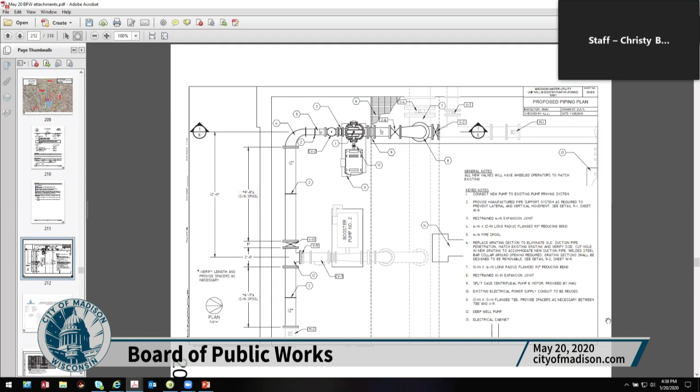Don't see his name in the queue, but I can certainly send him an email and point that out to him. Okay, thanks, Michael. With the safer at home order, I've got a lot more time to look at things like that, unfortunately. Oh, it's very helpful. Okay. So we'll take that under advisement and continue on with the consent agenda approved with that exception.

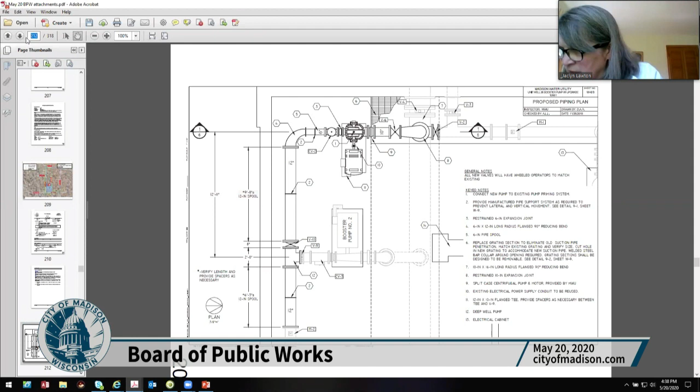And that public hearing. What item are we on then? 12? 10. 10. Do we want to start on 10 or save that for later? Let's save that. That gets us to item 12. Town of Burke agreement. Okay. What do we have here? So we need Chris Potowski.

Staff, when you're called on, can you please click raise hand so it's easier to find you? Yeah, sorry about that. Can you guys hear me?

Yes, thank you. Okay, so this item number 12 is an intergovernmental agreement with the town of Burke for the maintenance of Anderson Road and related storm sewer facilities. If you might recall, last year the Plan Commission approved a development on Manufacturers Road. As part of that development, Manufacturers Road would extend to Anderson Road, which is a town of Burke roadway.

The Board of Public Works approved those improvements on Manufacturers Road, and there were a few improvements in the town property as well. The town board has approved the work as well. And the final piece here is an intergovernmental agreement between the two municipalities for the joint maintenance of the street.

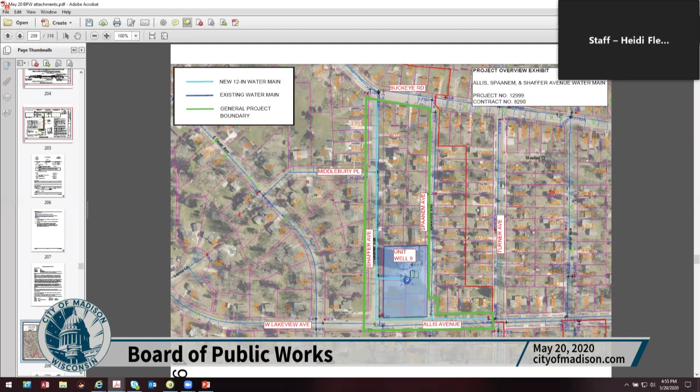Thank you. Go ahead. So you moved. Second? Second. Okay. Heidi, do you have that? Yes. Okay. Is there any objection by raising a hand? I'm going to put Joe's back down. Mute, then lower the hand. What a mess. All right, motion passes.

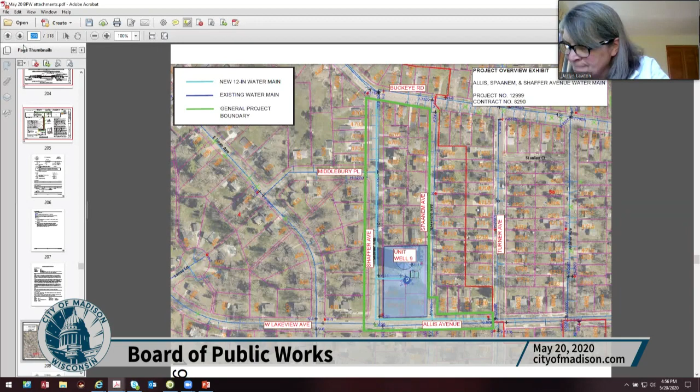Okay, now it's time for public hearing, which is item 5 with Kyle Frank on pipe lining noise impact. Okay. Kyle Frank. Hi, I'm Kyle Frank. I'm with City Engineering. So this is for noise variance for a lining project over on the north side. Kyle, people can't hear you. Anything? Heidi said you could not hear me. Can others not hear me? Yeah, you're really soft. I'll try and speak up louder then. Is that better at all? Yeah, that's a little bit better. All right, so

this is for a lining project and some night work variance that they are requesting. Essentially, what's going on is they need to use a different technique than they typically would because of the size of the pipe. And what that technique uses is hot water, and the process for bringing that water up to temperature takes longer than steam. And they didn't feel they could fit it in to the standard 12-hour workday that we allow, which is from 7 to 7. It sounds like it's actually going to take them about 15 hours to complete this work. So they're requesting to be able to work outside of those standard hours.

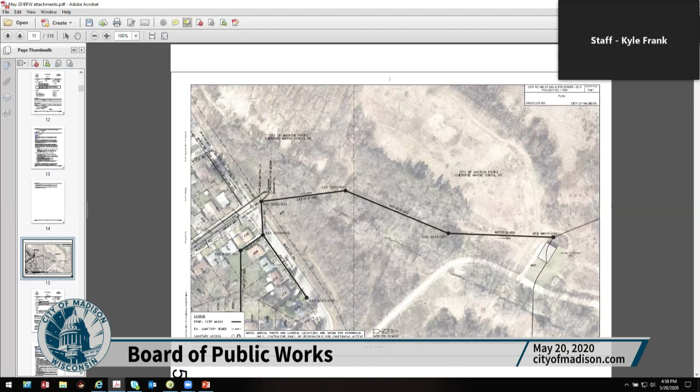Like I said, they think it'll take right around 15 hours total, which would put them being done at about 10 p.m. at night. So it wouldn't be a full night of trucks out there. It would just be roughly right around 3 to 4 hours would be my guess. Okay. Are there other questions? Oh, I have to open the public hearing. Seeing no registrants, as previously they would have had to have registered, I'm going to close the public hearing. Is there a motion to approve?

Okay. David, thank you. Mute, lower hand. And a second, Joe. Okay. Yep. Second. Second for Joe. Mute, lower hand. All in favor by acclamation? Seeing no opposition, motion passes. Thank you. Thank you, Kyle. Thank you.

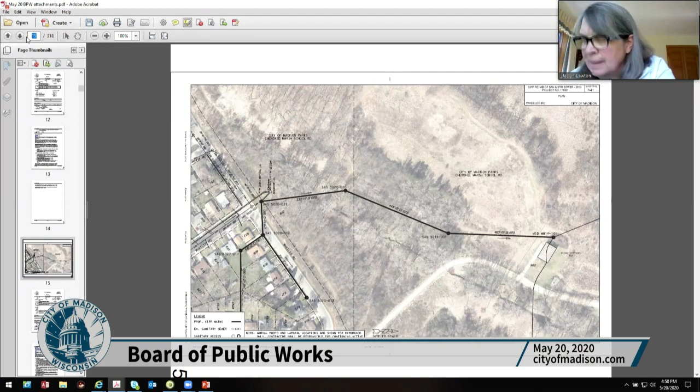Page 2. Three, we're on. We're on item 10? 6. 2 more public hearings, Jackie. Yeah, where'd those go? Oh, sorry. So now we're on item number 6. Okay. So this is also Kyle. Correct. Yes. Okay, Kyle. And we have a registrant when we get to that point, who opposes but wishes to speak. Okay. All right. So this is essentially a sanitary sewer replacement out on East Gorham Street from North Butler down to North Livingston.

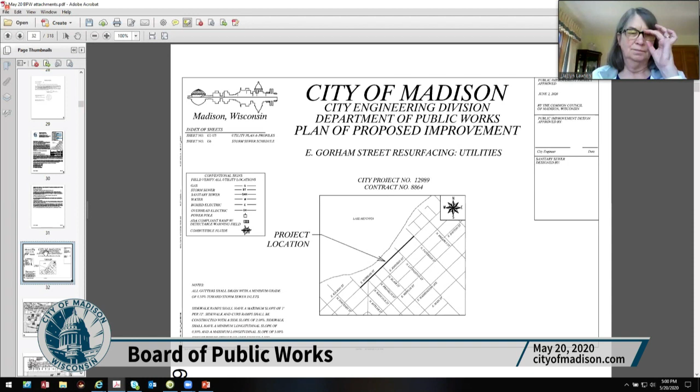Through our annual CCTV maintenance program, our operations crew identified this stretch of sanitary sewer as being in very poor condition. And it makes sense. The sewer is very old. It's from 1906 and 1928, so it's coming up on the end of its service life. Essentially what we found is basically every single segment out here had some form of cracks, fragments, breaks, sags, holes, you name it. So it was identified as being a priority for replacement.

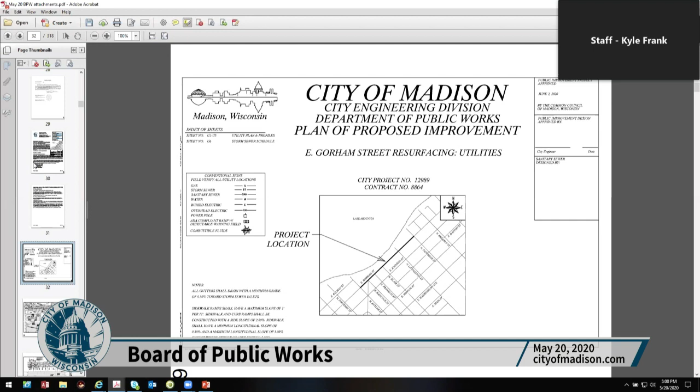And so that is what we are proposing with this project, a full replacement of the sanitary sewer and the laterals themselves. And then we would patch the street and repair any curb and gutter and sidewalk and drive aprons that were disturbed with that work.

It is an assessable project. The assessments would follow the city policy where the city would cover 100% of the sewer main cost. The laterals would be a cost share where the homeowner would be responsible for 25% of the cost and the city would cover 75%. And then all the concrete work would be a 50-50 split between the homeowner and the city. There is no water main work proposed with the project, and just some very minor storm sewer upgrades. So in general, this is basically a 100% sanitary sewer replacement project.

There has been some feedback from both the public informational meeting and through emails. One of them was for undergrounding and to install some conduit with this project. We looked at it and this project would not qualify under the city policy for any sort of undergrounding or including conduits. Because it's a utility project only, we won't be reconstructing the whole street. We'll just be trenching in where we need to replace the sanitary sewer and the laterals and then patching it in. And those trenches will only be roughly 10 feet wide.

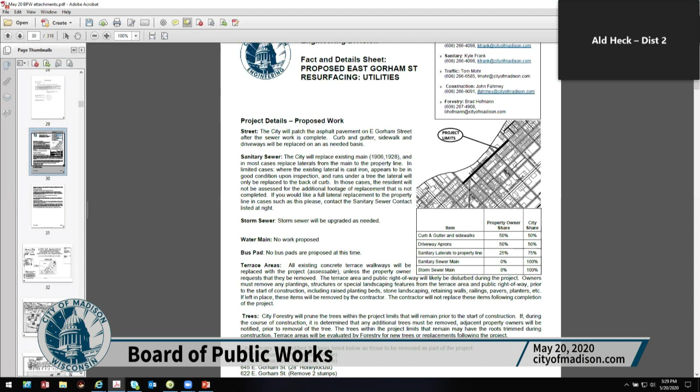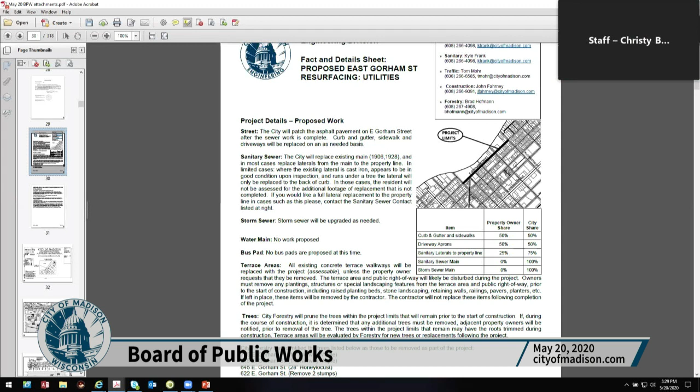Thank you. With that, we have a motion and a second. Is there any further discussion? Any objections? Seeing none, motion passes. Thank you. We're on to item 7 with Andy Zweig, Dairy Drive Assessment District. And just so you know, Madam Chair, there was a registrant for that came in after I sent you that PDF. So okay, thank you.

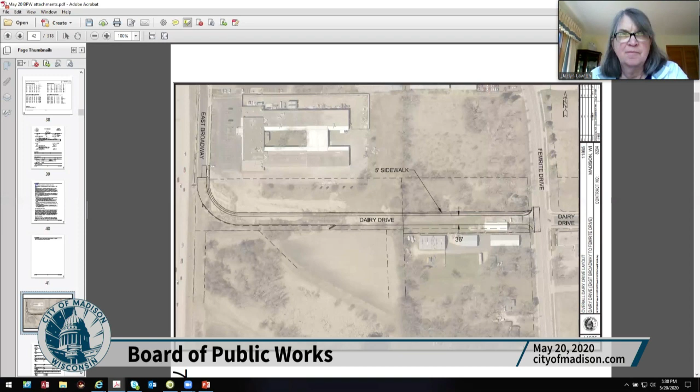Hi, everybody. My name is Andy Zweig. I'm with engineering. I'm here to talk to you about approving the second revised assessments for Dairy Drive. We decided to revise them a second time to add clarity of what the city costs for the assessments are. We have a stormwater utility parcel, which was previously listed on the assessments. We have another parcel, which is city engineering, that wasn't listed on either last version of the assessments, but was still being utilized for the calculations. It just wasn't shown.

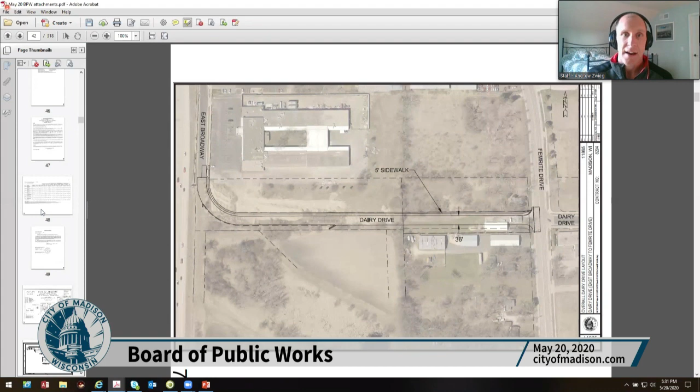And we also have some DOT right-of-way frontage, which doesn't have any parcel number associated with it. So it wasn't shown on the assessments, but again, it was factored into the calculation. This second revised assessment just shows those two parcels of frontages to show that they are being calculated with the assessments. And also we received the bids for the project, so we just recalculated the costs based on the bid prices. So that is why we did the second revised assessments for Dairy Drive. And Dairy Drive is currently in construction.

Okay, thank you. Is there any discussion? Seeing none, I'll open up the public hearing. We have one registrant. Paul? Yeah, the registrant, his name is Tyler Marks. In support, does not wish to speak, but is available to answer questions, and he is in the attendee list, so he is here. Okay. Are there any questions for Tyler? Seeing none, I'll close the public hearing. Thank you for coming out, Tyler.

Is there further discussion? Alder Evers, excuse me. Yeah, I was just going to make a motion to approve. Sorry. Thank you. And a second. David? Second. Motion is approved unless I see an objection. Seeing none, motion passes. Thank you. Thanks, everybody. Thanks. Yep, exactly.

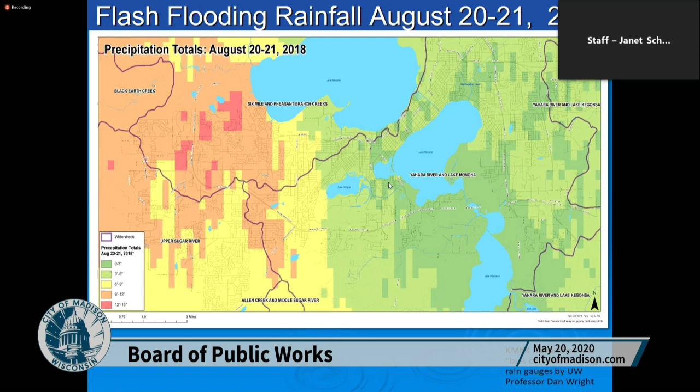The rainfall that we got in August of 2018 was, in certain areas, between 12 to 15 inches of rain. And if you look on this graph, 7 to 9 inches of rain over a 6 to 12 hour time frame, that's a 1,000-year storm event. So that's pretty unprecedented for anybody.

So if you take the tabular data, again, this is the NOAA Atlas 14 in the inset, and you actually graph this out, that's what this graph is, and the blue line indicates the Atlas 14 information. The vertical axis is rainfall in inches, and the horizontal is the recurrence interval, indicating the year event. So that's the blue line. The orange line is Professor Dan Wright. He actually took this information and made it more specific for the Madison area.

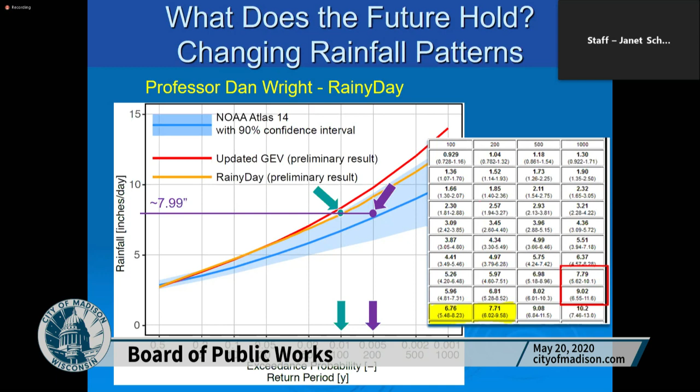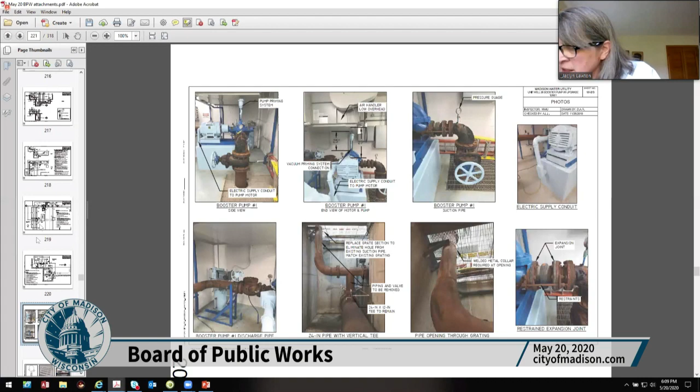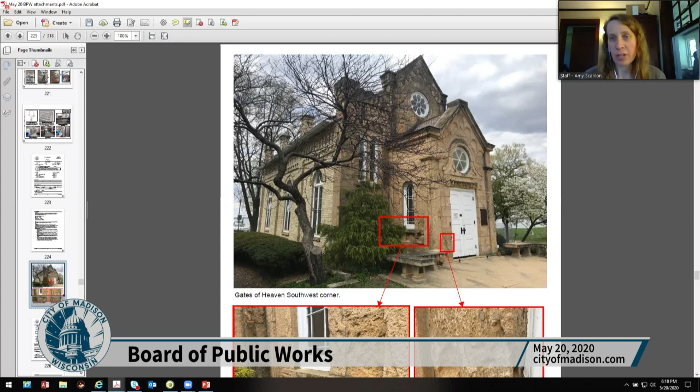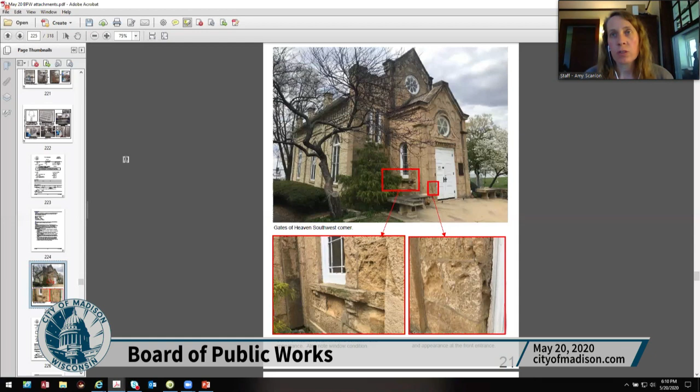Hi, I'm Amy Scanlon with engineering. The Gates of Heaven exterior restoration project will restore the masonry, the windows, and doors. The more specific scope includes cleaning and consolidation of the Madison sandstone, limited repairs to the stone, cleaning of brick, repointing of the stone and the brick, rehabilitation of the wood sash, doors, and related trim, and then the installation of exterior storms on all windows. That's pretty much the project. It's pretty extensive, but simply just the exterior.

Sorry, Jackie, I can't hear you. Unmute me. Michael Cullen, you should be able to go now.

Yes. Are there limitations to the type of materials that can be used for the windows and the doors? Yes, in that the existing windows and doors will remain, they're just being restored. And it would seem, as far as the windows go anyway, that the cost of restoring or rehabbing the sashes and adding storm windows are going to be pretty expensive.

This is a designated landmark and listed on the National Register of Historic Places. So we need Landmarks Commission review of this project, as well as State Historic Preservation Office review. Both have given approval of the exterior restoration of the windows and doors. So replacement is really not an option. Replacement isn't an option because that's not what they approved, but if they were requested, they may approve it, or? I doubt it. The idea is to retain historic fabric, not replace it. And these windows are easily repairable. Okay. Thank you.

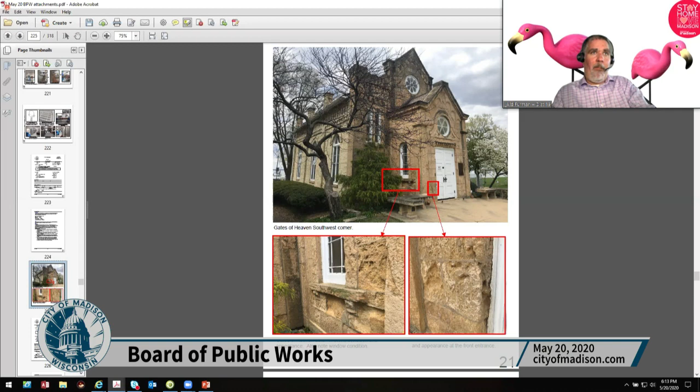Joe Clausius. Approval. Joe? Yes. Did you want to say something? No, I said if there are no other questions, I'll move for approval. Oh, thank you. That'd be great. Alder Furman? I'll go ahead and second that. Thank you very much. Is there further discussion? Oh, shoot, wrong thing. Okay. All in favor? Unless I see objection. Michael, were you?

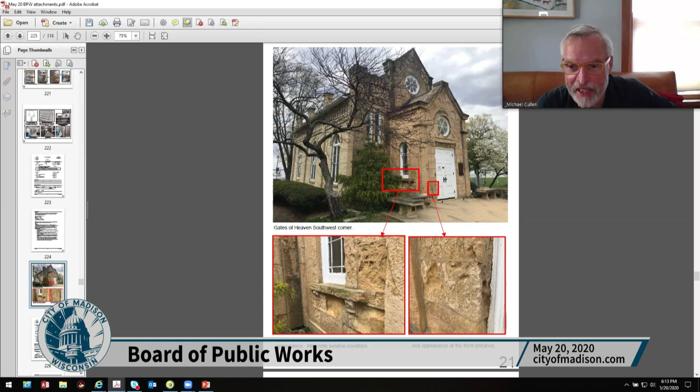Michael, were you? I just had a comment. I think I like the pink flamingos better than the polar bears for Keith's background there. I was worried what happened to the flamingos if the polar bears ate them, but wrong parts of the world.

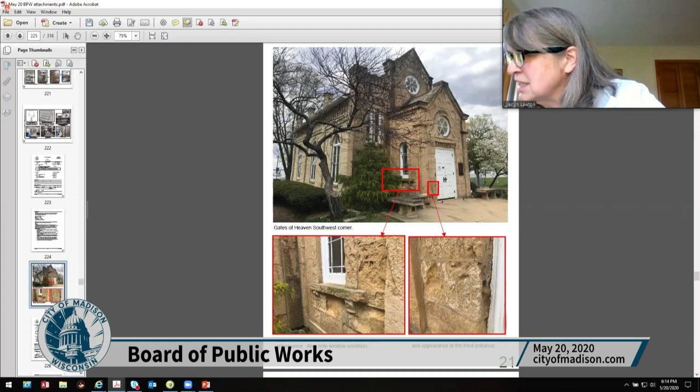Anyway, seeing no objection to the motion, it's approved. Thank you. Thank you, Amy. I think that takes us to item 26, interim pilot program for funding rain gardens.

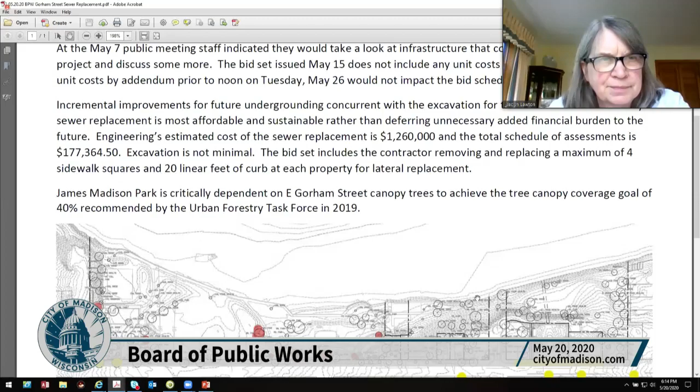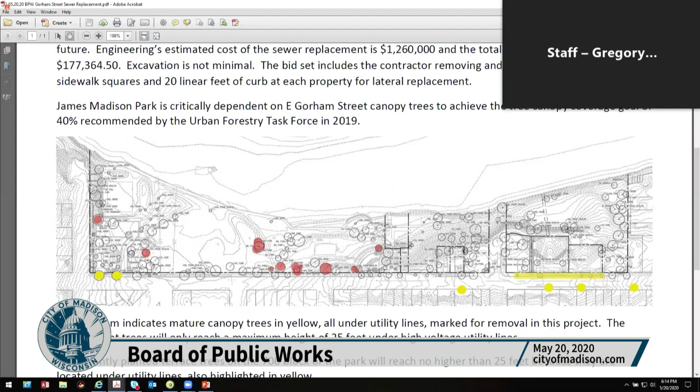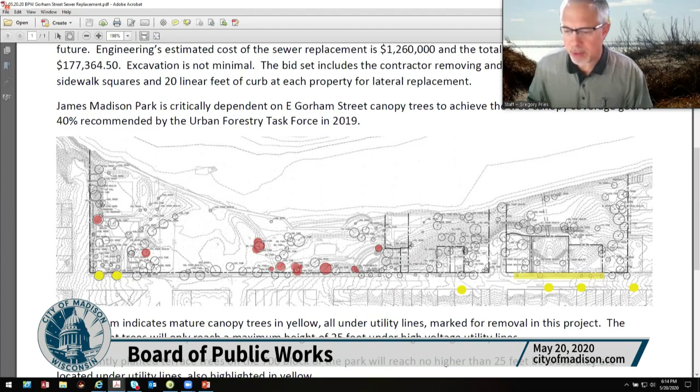This is the Greg and Janet show again. Thank you. I was trying to find the hand to unmute myself. Okay, so this is not the slide I want. So can I share my screen perhaps? Go ahead. Yeah, you should have a share screen button at the bottom of your screen. All right, let me do that. I always find this a little disconcerting because I lose what I'm seeing, but do you guys see an interim pilot program for funding rain gardens? Is that what you see? Yes, we do. All right, awesome. I'll just speak for everyone. Yes, we do.

So what I just want to talk about here briefly is, you all might remember, probably about 2 months ago now, we had a joint MOU agreement with the USGS come through the board to study green infrastructure and the application of green infrastructure on a watershed basis, right? Not just at a parking lot, not just at a Walmart site, but what happens when you do it on an entire watershed. That is proceeding. It's a 5-year study, 5 to 6 years actually.

I do have a map, but you might remember it's over by the Glenway Golf Course, the watershed we're doing this in on the near west side. We have 2 street reconstructs that are going to get pervious pavement this year. We talked, I think, a bit about that. And so we're going to do a fair amount of public works green infrastructure in this watershed, but that's not going to be enough, right? What I need to do is document what I would say is critical mass of green infrastructure in a watershed. So with our reconstructs this year, we're getting 14 rain gardens from residents who want them.

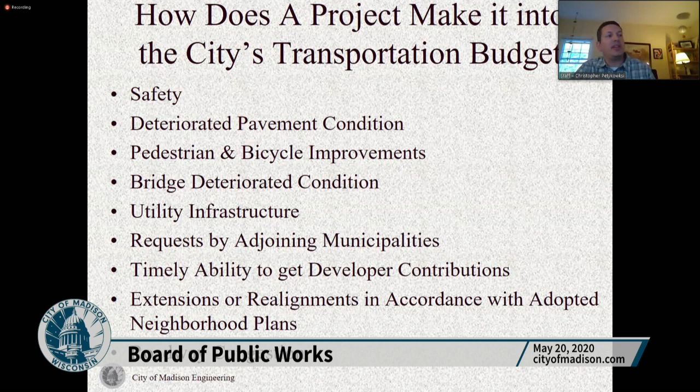Other items could be ped bike improvements, bridge deterioration, coordination with other municipalities or developers, and also some extensions or realignments in accordance with neighborhood plans, and lastly, roadway congestion. So I'm just going to kind of go around the city in a counterclockwise motion, starting at the downtown, and just go over some of the highlights for you.

So starting in the downtown area, we've got a number of things programmed. In the Judge Doyle Square area, we've got Doty Street, Wilson Street, scheduled out in 2023-24 for when the Judge Doyle Square development is fully complete. We have a joint project with the state on Blair Street and the John Nolen Blair intersection. We have some federal safety funds to help with that project, and the state is actually paying for the reconstruction of Blair Street along with that project. So that's a nice project. We're scheduled for 2022.

On West Washington, we're looking at resurfacing with utilities on the 400 and 500 blocks, and look to implement some of the markings included in the BRT study. There's actually a southbound bus lane proposed for West Washington Avenue. And a new project this year, 2024 West Main improvements. This was a TAP program application that we put in that was awarded just recently. We would be working towards making West Main Street a bike boulevard. And one of the first improvements there would be a new RRFB and safe crossing of Proudfit at Main.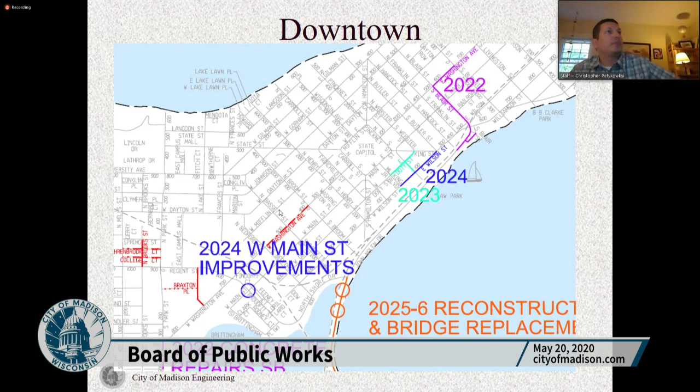John Nolen Drive. This is a reconstruct project from North Shore Drive to Olin Avenue. Included in this project will be the replacement of the 6 bridges, 3 northbound and 3 southbound bridges in the causeway. We'll also be looking at replacing the shoreline along this area and expanding ped bike accommodations here. This is, I think, one of the top 2 or 3 most popular bike paths in the state. So what we're going to be looking to do there is expand it to allow for a separate sidewalk facility and bike facility, so that both pedestrians and bikes have their own path.

So that is going to be one of our requests for the next round of federal funding from the MPO. And we're currently looking at 25-26 for that project.

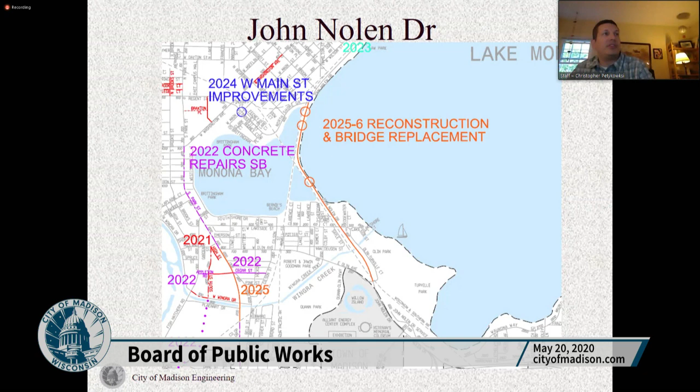University Avenue is a federally funded reconstruct that's already been approved by the MPO. We're scheduled for 2022. It would be a reconstruct from Shorewood Boulevard to University Bay Drive. It's a 6-lane reconstruct. We're including sidewalk on the north side of the street where there's missing links, as well as looking to include a new ped bike bridge for the Campus Drive path and Blackhawk path over University Bay Drive.

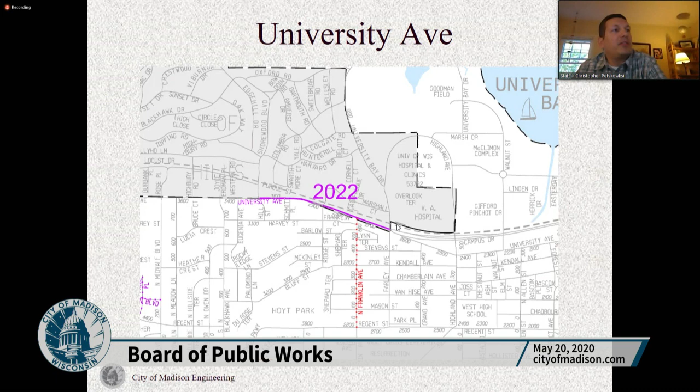Further out west, we have a joint project with the City of Middleton. This is also MPO federally funded. It would be a reconstruct from Highway 14 down to Timberwolf Trail, which is just north of Old Sauk Road. We would be reconstructing it to a new urban boulevard with a multi-use path along the stretch as well.

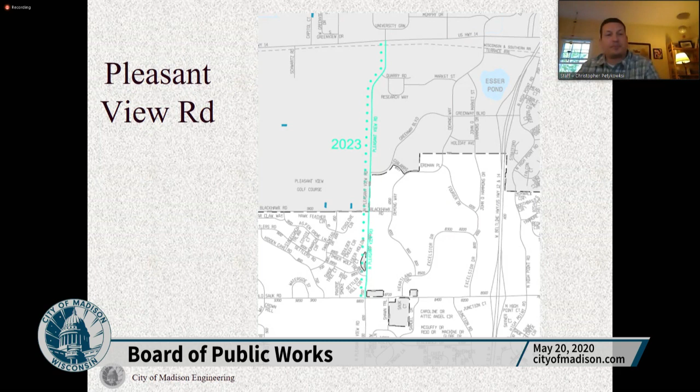West Towne Path is another path project that we've been working on over the years and looking to implement the next few phases. Some of you are probably familiar. Right now we're constructing from Grand Canyon Drive to Gammon Road, including a new tunnel underneath Gammon Road. That's under construction right now and was part of the TAP program previously. This West Towne path currently exists from Whitney Way up to Grand Canyon and Struck, and as I mentioned, we're extending it to Gammon.

In the future, we're looking to extend that path along the north side of the Beltline over to High Point Road, where we have a connection already built to cross High Point Road and a connection already built to Commerce Drive.

And also in 2023, this is another new one in the TIP. We've been looking at this over the past few years, but recently applied for TAP funding for this and were awarded. So this is now programmed. This stretch from Commerce to Junction is scheduled for 2023. That would be a new multi-use path along the north side of the street, protected facility.

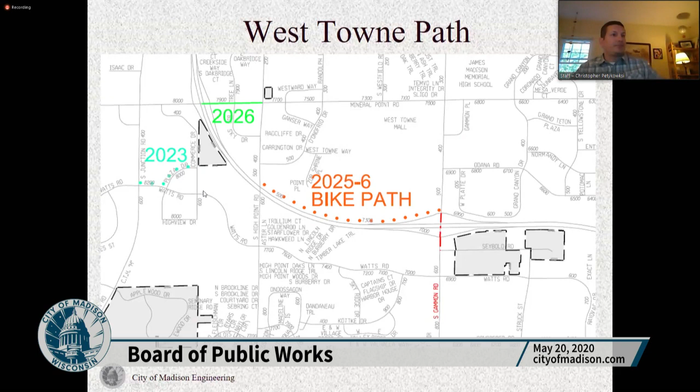Okay, heading over to Park Street area. We've got a number of projects scheduled here. So those of you probably remember in 2020, we did joint repairs on Park Street on all the northbound lanes in these purple areas. So that's West Wash to Olin, and then from the railroad to Badger.

In 2022, we're gonna pick that up and continue and work on the southbound lanes. There's a gap that we have right now that we purposely scheduled to avoid conflicts with Fitchburg's Fish Hatchery Road reconstruction. We didn't want to be working on both corridors at the same time. So we're proposing our southbound lanes in 2022.

Between Olin and the railroad, the pavement is in much worse shape, and we are working with the state to try to schedule a reconstruction in that area. So that's this orange stretch here. Also, in this area, we have a new Cedar Street extension through the Truman Olson property, as well as some South Street resurfacing and stormwater improvements. That's scheduled for 2021.

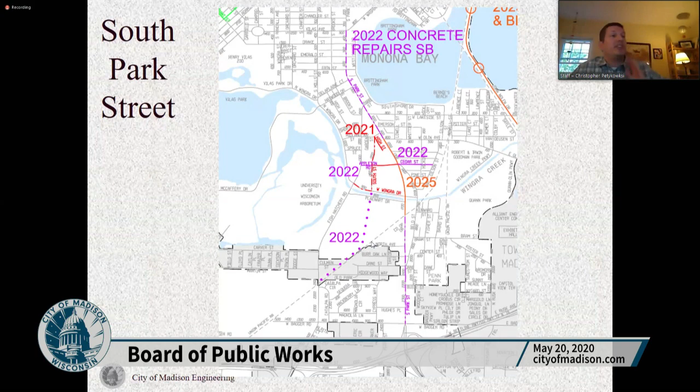Okay, another new one. Now we're on the very far southeast side of the city. Here's the Beltline interchange with I-39. There's the Ho-Chunk area. We got Mill Pond Road and County AB. Those are some of our most dangerous intersections in the city.

And we've been working with WisDOT, Dane County, and the Ho-Chunk Nation to try to work together on a project which would reconstruct the two at-grade intersections with Highway 12 and construct a new interchange on County AB and two frontage roads along the north and south of Highway 12 and 18. So that would replace those two at-grade intersections with one interchange and frontage road system. That is currently showing in 2022, a large project, as I mentioned, jointly with WisDOT and others.

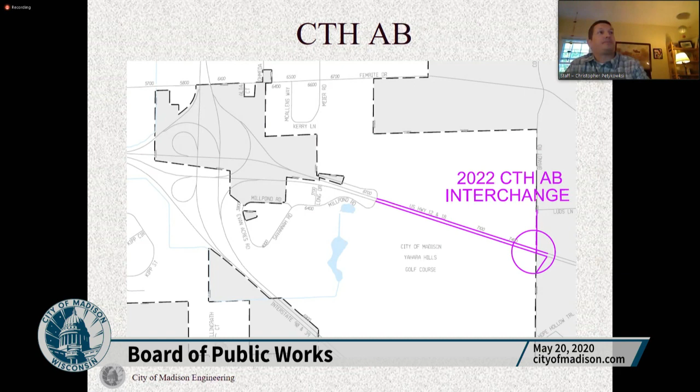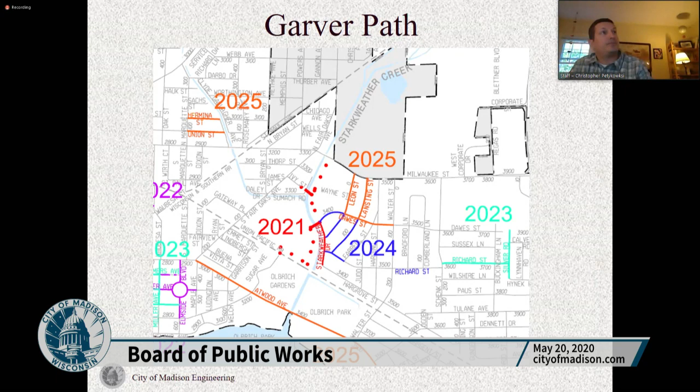Autumn Ridge Path is another path and bridge system that we're starting to work on the design for, and hoping to fit into our MPO STP Urban requests next round, to see if we can get that funded in 2026. So this is a new path system from Milwaukee Street up through the Hiestand Park for the southern stretch here. Utilize some very residential on-street streets for a stretch, and then picking back up on a path and a new bridge over Highway 30 to a plot of land that we own on Ziegler Road.

And what we're doing with this Garver Path and this Autumn Ridge Path is really try to connect the Cap City Trail to some of these more eastern, northeastern neighborhoods, and continue our way up north and east, and try to connect those neighborhoods into a nice protected pathway or residential street system to get them onto the Cap City Trail.

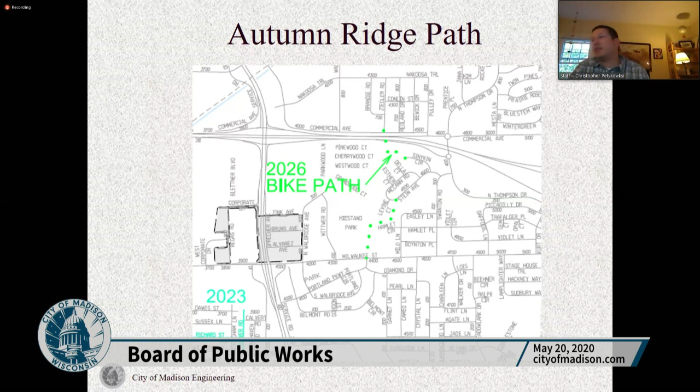Atwood Avenue is a project we've been working on. Actually, the design is complete. We'd be proposing to reconstruct from Fair Oaks to Cottage Grove Road. Currently showing that in 2025. As I mentioned, the design is done, but we are waiting for federal funds, and this would also be one of our MPO requests in the next cycle next year, and currently proposing 2025.

I should mention, if there's any kind of stimulus funds or recovery funds available, this would be a good candidate because it is a shelf-ready project. It's a nice reconstruct that really greatly improves ped bike facilities along the whole stretch, and we're excited about trying to get that done.

Troy Drive underpass is a ped bike underpass of the railroad at Troy Drive. Right now, there's an old stormwater culvert that's utilized for folks to use the sidewalk on the north side of Troy Drive. We would be proposing to replace that with a new, well-lit, well-drained standard underpass with good visibility. That's the concept of the project there. I should mention the design of this is currently on hold.

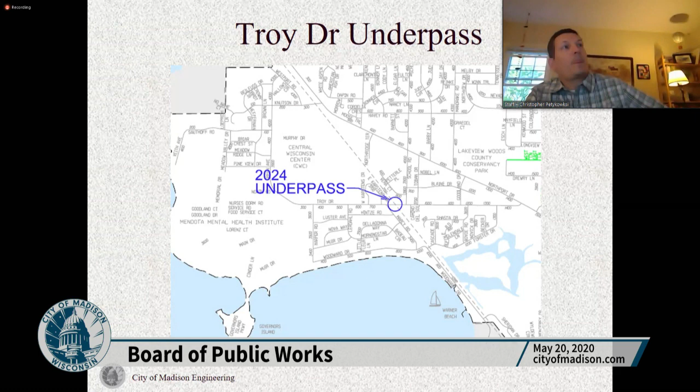Okay, so that's a lot of the major streets. We also have some very important parts of our budget that are in those tables: our programs. We have a reconstruct program and a pavement management program. Reconstruct streets are streets that generally are local, residential streets, a lot of times single family homes. This year, we are proposing to reconstruct 4.8 miles, and the list of streets is here. I won't go into all of them in detail, but please let us know if you have any questions or concerns or streets that you want us to consider for this program. We're looking at 21 through 26. This is just showing 2021 right now.

Pavement management is another program. It's very important for us. The GO funds for both of these accounts are fairly similar, about 10 to 11 million a year. I'll back up a second: with the reconstruct program, we can get about 4.8 miles of streets reconstructed. That's pulling out all the base, all the curb and gutter, and all the pavement and reconstructing. With pavement management, with that same amount of funds, we can chip seal 50 to 70 miles. We can crack seal 50 to 100 miles. We do a lot of patching throughout the year on arterials, and we can resurface 6.5 miles.

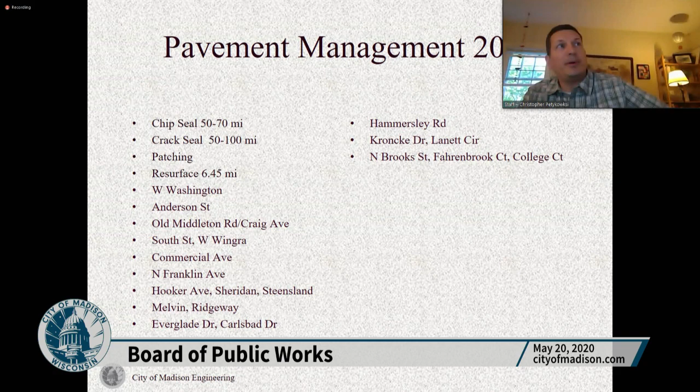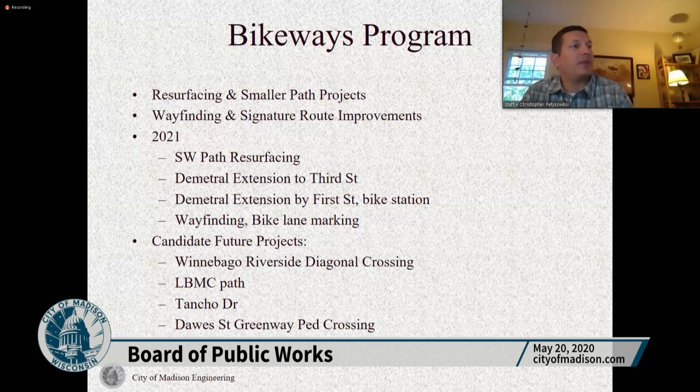The bikeways program is also another important program for us. This generally does a lot of the resurfacing of smaller path projects. We rate our bike paths similar to our streets and try to resurface those when it's needed. In 2021, we're looking at some more southwest path resurfacing, a couple extensions of Demetral path, as well as some wayfinding and bike lane marking, and we have a few candidate future projects in the out years.

Sidewalk program, also a very important program. This is where we go around the entire city once every 10 years, so basically that's about 2 aldermanic districts a year. This year we're working in Alder Revere and Presta Giacomo's. Next year we have Alder Evers, congratulations, and Alder Carter. Those are areas where we go around and walk the sidewalks, determine any imperfections, cracked sidewalks, sidewalk that doesn't drain properly, and replace those. It's important for our liability to show that we're maintaining our sidewalk across the city.

Also in the sidewalk program, we take a look at extending missing links, gaps that are identified by the MPO, and also requests from alders and other requests from the general public. And these are the projects that we kind of have on our horizon. We are

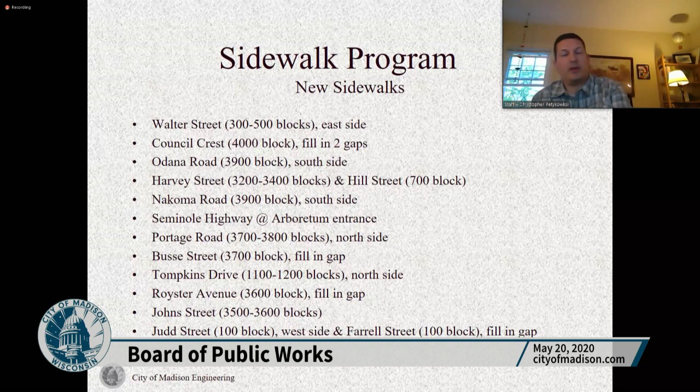looking at quite a number of projects. Usually each year, a number of these drop off due to the public process, or some difficulties in the design. But this is kind of what we're looking for next year. A number of these are ones that were supposed to be looked at this year, but with staffing issues and COVID response, we were unable to get to. So that's kind of the list we're looking at there for 2021 for the sidewalk program.

Okay, real quick, lastly, I'll just give a summary of where we are on our streets. I think I mentioned we rate the streets every 2 years on a scale of 1 to 10, with 10 being a brand new street, and 1 being the worst. We have a goal that we try to keep up with on each type of street. So on local streets, these are the residential streets, low volume. We have a goal of trying to keep less than 30% of total miles at or below rating 5. And right now we've been meeting that goal pretty well over the years, currently at 25%.

So collector streets, those are kind of your in-between streets. They're not the residential streets, they're not the University Avenues, but they're kind of the in-between collectors. Our goal is to have less than 20% of total miles at or below 5. And right now we're a little bit above our goal at 25%. Arterial streets, we have an even more aggressive goal due to the fact that there's so many people using them. We want to usually try for less than 15% of total miles at or below 5, and currently we're at 25.6.

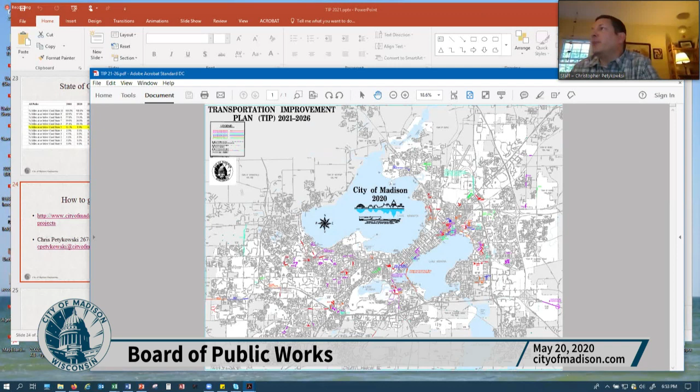Michael, unmute. Okay. Michael? Yeah, I just wanted to say it was a very good presentation there, Chris, and I appreciate it. You're to be commended. Thanks. All right. Further discussion? Is there a motion to approve? There's actually nothing to approve. It's information. Nothing to approve. Yeah. Okay. That's item 30. Great. Thank you, Chris.

We'll go on to item 31, awarding of a contract. All right. It's Christy here for item number 31. Do you guys have to put it on the table first before I do the recommendation? Jackie? What? No. Oh, it's up. Item 31. All right. So there it is. Okay. We are recommending awarding Public Works contract number 8907 Orchard Street sanitary sewer repair to the low bidder, Speedway Sand and Gravel, Inc., in the amount of $205,986.82. Is there a motion to approve?

I lost my group again. Okay, David. Unmute. Okay, David. Thank you. And second, Joe. Oh, hang on. Joe. Thank you. That was a second from Joe. And all in favor, unless I see any objections? Seeing none, motion passes.